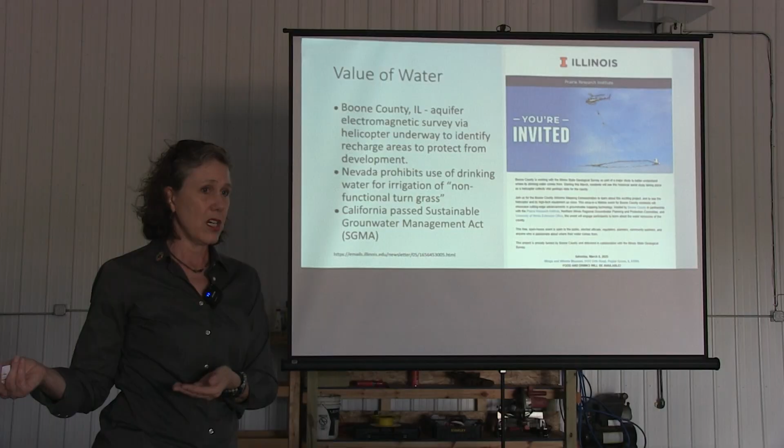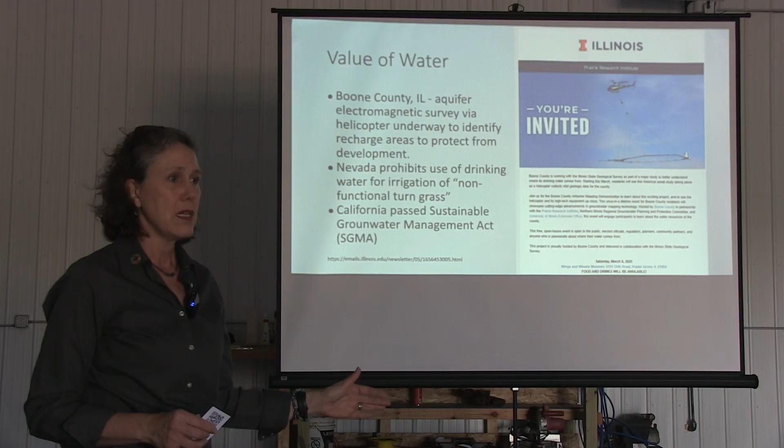But what happens if somebody just across your county line moves in with a data center or something like that and draws your water down? What recourse do you have? The answer is none. So then I asked, well, what other state's doing a better job? And another person from the audience offered California's Sustainable Groundwater Management Act. I love sharing information this way. We don't need to reinvent the wheel. We can just look for whoever else has already adopted a solution, and then we can learn from their lessons learned to adopt that in a better way.

Reuse is a really complex topic. It depends on the scale of your application, from centralized to distributed to your home, and it can be broken up by barrier, or by your applications. So we've got reuse irrigation, there's industrial reuse, there's non-potable reuse, and potable reuse. And there's different barriers for each of them. Public perception used to be a big barrier. I think once you have the need, the public perception starts to wake up to the need.

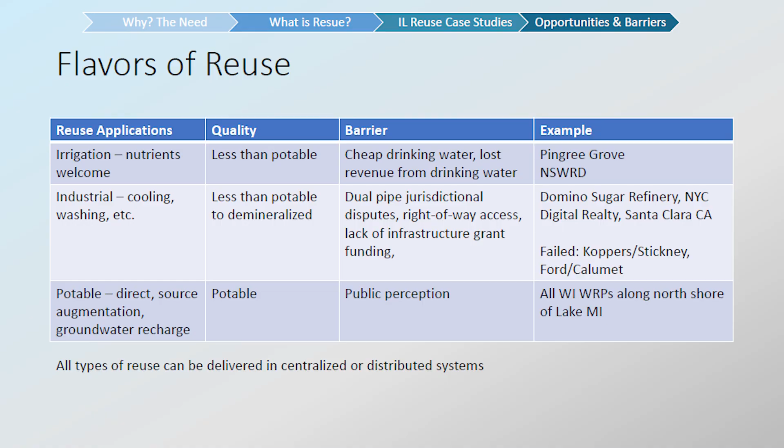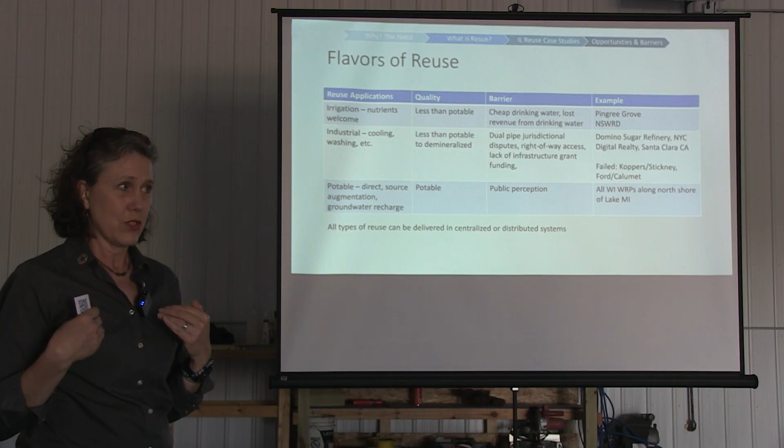And then also you can point to certain things that I don't know how publicly aware we are, but the International Space Station recycles their water every day. And so your coffee today is your coffee tomorrow. Now, they don't have industry up there, so we have that challenge. So if you were to just scrap the whole civilization thing and start over, you would not have a mixing of your industry and your residential, your municipal waste. So you would actually have industry treating their own waste.

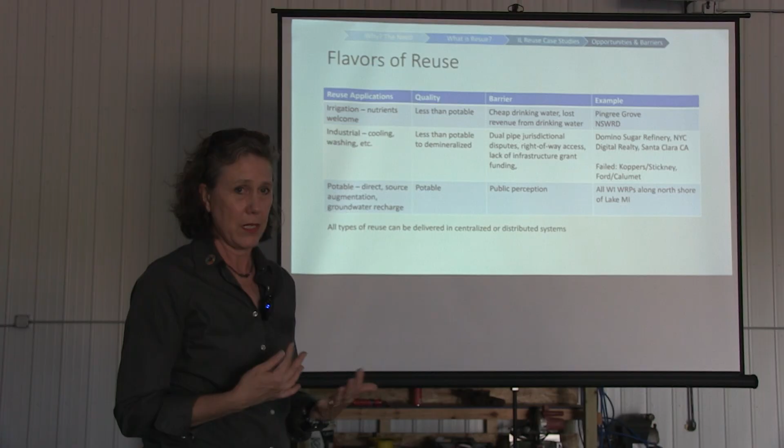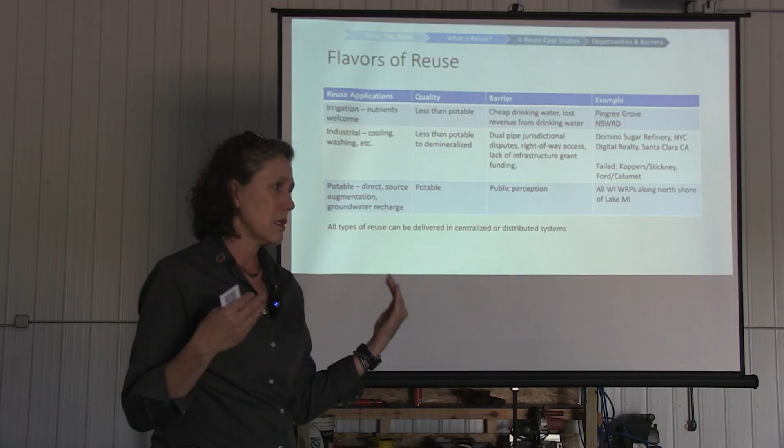I like to give the analogy of your kids cleaning their room. Do you send it all down to the kitchen to get cleaned and then bring it back up? No, you ask them to clean their room where it is, because that's the most efficient way to do it. So once we start commingling the industrial contaminants with the municipal wastewater, it makes everything harder to treat, and then you have contaminants of emerging concern, maybe things that you can't readily detect, or they're super expensive to test for, or there's no regulations to test for it, etc.

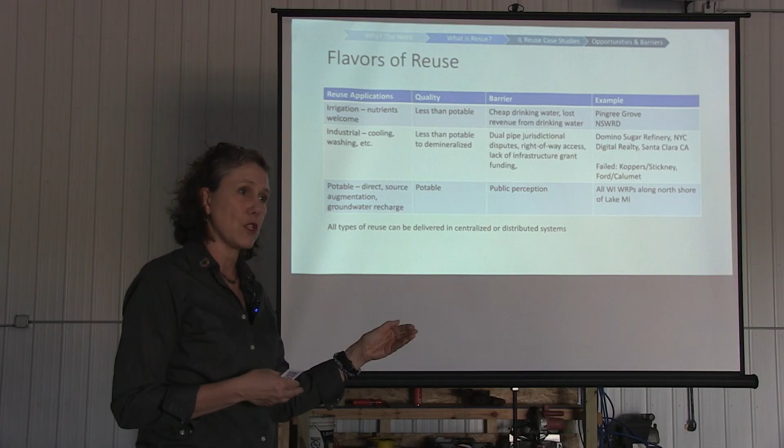Whereas if you treat it at the source, then they know what's in that water because it's what they put there, and they don't really want to tell you because it's proprietary information, but the chemicals in that water could actually be useful for them to recover and reuse. So there's the International Space Station. Coffee today is your coffee tomorrow.

I also wanted to let you know that there is a 57-year-old direct reuse project. It's not us, sorry. This is in Namibia, in the continent of Africa. It was put online in 1968, the year of my birth. So I always remember how many years people have been reusing water, and this is in an arid area. These flows are required for fire flow and also for basic sanitation. So it cannot fail. They do not have the luxury of taking this offline. And they've been doing it since 1968.

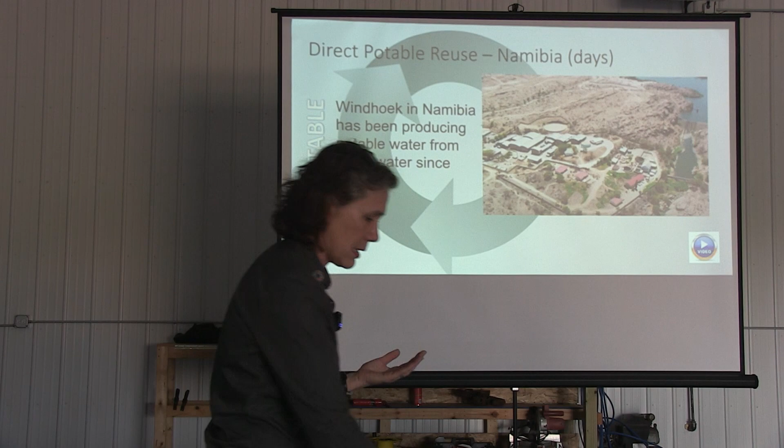One big topic that we're talking about in Illinois Section American Waterworks Association right now is what is source augmentation. Because we are the only state that actually has a reuse prohibition in our source water code, we can't really say reuse in the state of Illinois. But we're not alone in that.

Wisconsin doesn't have rules either, but yet they were able to take Waukesha off their groundwater and hook into Lake Michigan, or at Milwaukee, and then they treat it and they discharge it to the Root River, and then it goes back to Lake Michigan.

So that is an example of source augmentation, but once you start picking apart the water cycle, you start realizing that every time we discharge out into the environment, be it irrigation or to a stream or discharging to groundwater, you're augmenting the source water to somebody. It may not be you, but it may be the guy downstream. So that's just an opportunity for public education and learning right now.

If I have my way, we will have a source augmentation 101 presentation at WaterCon next March, sponsored by Illinois Section American Waterworks Association. So other examples, back in the drought of 2014 to 2016, that drought impacted from Minnesota all the way down to Texas.

So Texas was in a world of hurt, and they went from, it's indirect potable reuse right now, but they actually plugged their wastewater system. They built an advanced treatment system, plugged that into their advanced treatment, and then the advanced treatment went to their permitted drinking water plant, not because they needed to, but because that's the rules in the United States of America, that you have to have a permitted drinking water treatment plant for surface water.

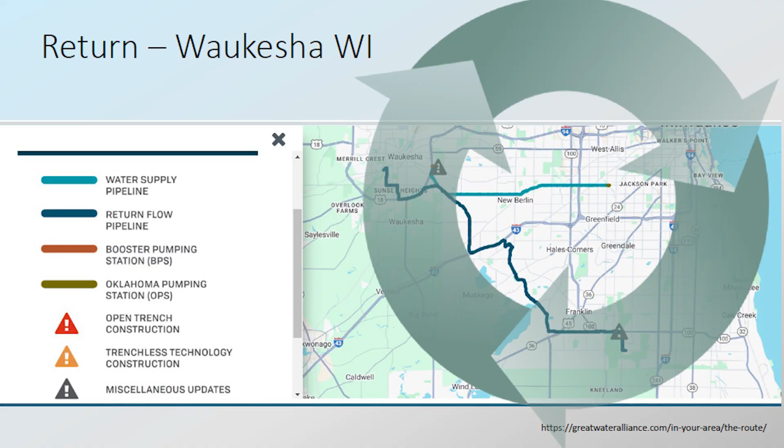But if you go to the guy who wrote the permit at Wisconsin, he will not call it reuse. And that is because they do not have the rules. So we can talk about this as return, because we do have rules from the Great Lakes Compact that you must return the water to the Great Lakes. So this is officially a return project. You can see a lot of these things are language. A lot of them are business decisions. None of this is technical.

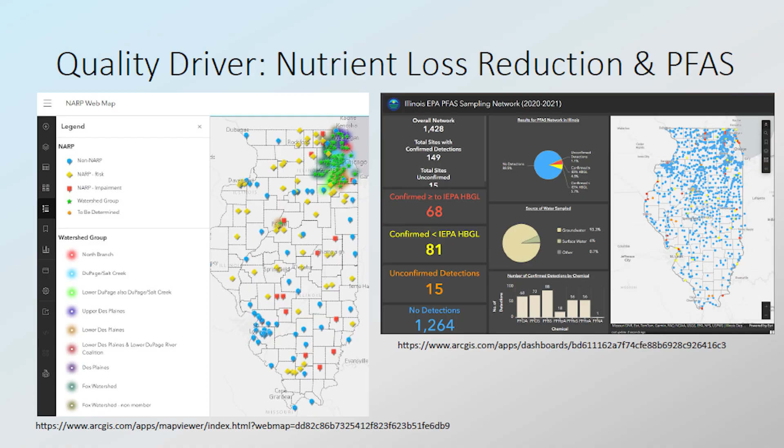Here's the nutrient dashboard from IEPA, and we also have the PFAS dashboard from IEPA. So the folks at the state will say PFAS is the reason not to do reuse. But if you talk to the person who wrote the guidance document for Texas at national conferences, she'll say something like: direct potable reuse systems, those processes will be more resilient and able to handle removal of PFAS than traditional.

I think that says the processes can do both, but I think her way is the better way to say it. My way is just shorter and probably more direct, right?

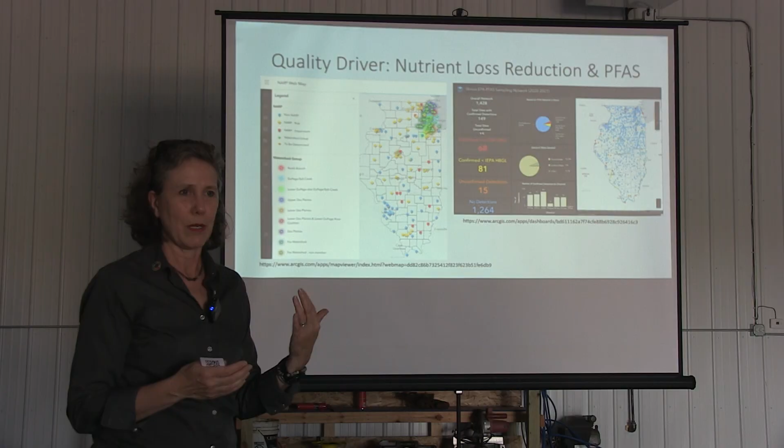We do have the nutrient reduction strategies that you're all aware of, perhaps painfully aware of, where decreasing nutrient concentrations are begetting questions of: do we upgrade our treatment plant, or is there some other option? The irrigation permits are where this has come in, because if you take your discharge and field apply it, land apply it, you could perhaps avoid some costs.

This is an avoided cost, right? So this is a balancing act, except you have to know that's an option, because right now in our code it says 200-foot setback for treated effluent irrigation. And there's pretty much no place in civilized Illinois where there's 200 feet of setback around a wastewater treatment plant. So that's kind of a deal stopper right there.

And then you can do a 25-foot setback if you have a 4-foot fence. And the third option is, if it's a golf course, you can do whatever you want, as long as it's at night.

All right, so here's the drivers. This summarizes what Scott was mentioning. This is a publication from the Illinois State Water Survey from 2017, and I like to compare this.

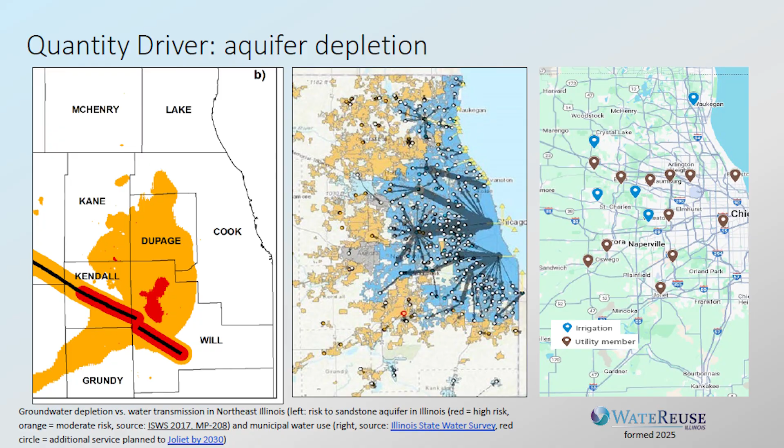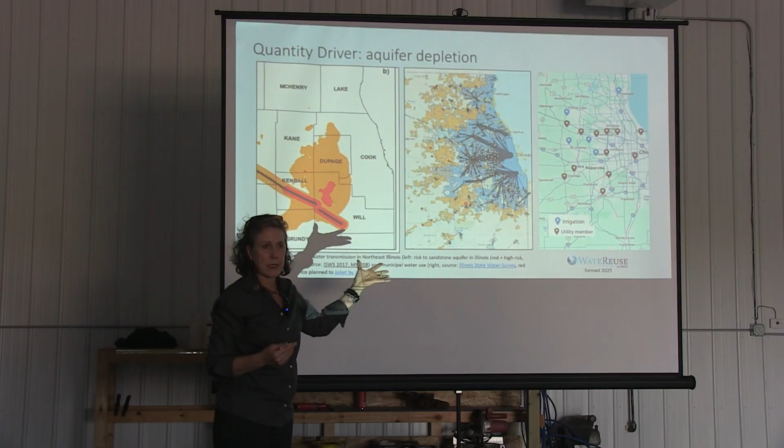Is that fuzzy? I don't know if I should. Can you guys see it? Maybe that's a little better. So here's the aquifer that's drawing down, and I just like to compare the overlapping. The middle one is all those pipelines extending from Lake Michigan water.

So right now we have two kind of soft policies at IEPA. One is interpretation of the 10 State Standards: use the best available source. So they're saying, as they decided the permit for Joliet, that only Lake Michigan is the best available source, not accommodating any kind of quality or economics of extending the pipeline.

Now if you extend a pipeline, the longer it goes, you've got this kind of linear-ish curve of cost increasing with distance. But if you do reuse, that's a localized treatment, and that's a flat cost. So at some point those cost curves are going to intersect, and it's going to be cheaper to build a reuse treatment plant on site than extend water from City of Chicago or some other West Shore producer.

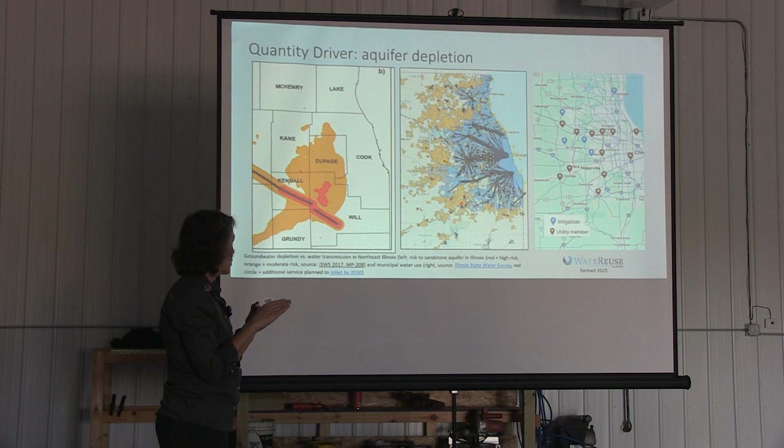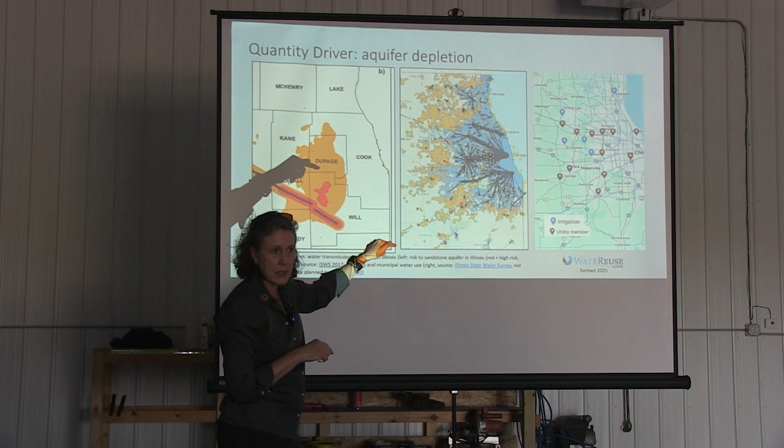Then the right one, stage right, is where we have the new chapter of Illinois Section Water Reuse Association, the brown dots—perhaps I should have picked a better color. But a bunch of those are Metropolitan Water Reclamation District, which has 7 plants. And the blue ones are irrigation, recycled water irrigation applications. I'm learning about new ones all the time.

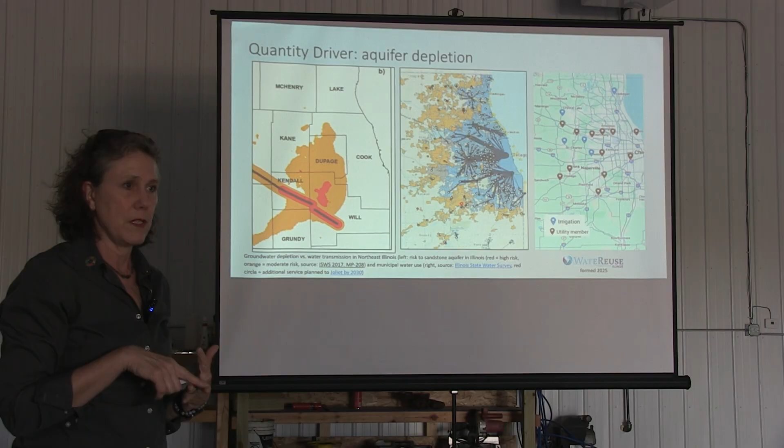And one specific one that isn't irrigation, it's industrial: you might be aware there was a bill passed and just signed last week, maybe more than a week ago. Pritzker signed a bill allowing Bloomington Normal to sell within a 50-mile radius. I have a slide on that, so we'll talk about that again in just a moment.

So the opportunities are basically irrigation, to share your nutrients—which are a valued resource—with folks who want turf grass. The other opportunities are data centers. We have in Chicago, right on the shores of Lake Michigan, the proposed largest quantum computing site in the world, I think it is.

It's this big collaboration, and I think if it's worked right, this could be an opportunity for transparency because the government is involved—that's our tax dollars. We should have a little bit of say as to how that's operated. There was an article in the Tribune a couple days ago that said Illinois was the 4th largest data center state. I don't know if that's accurate, I guess that's just numbers, because they don't really know how much water people are pulling since it's all proprietary. Why that should be is another question.

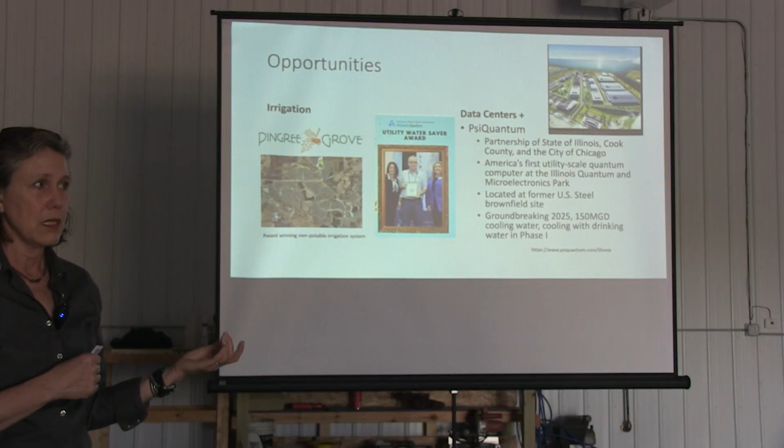That's interesting that more information is needed. So this quantum facility, best available information is that they still want to break ground this year, but as of June, they hadn't transferred the property yet. They do want to use drinking water for phase 1 and a total flow of 150 million gallons, but I assume that's fully built out.

The other thing in the Tribune, and I would love to fact check this one, they said 97% of all data centers use drinking water for cooling. That blows my mind. So we are reaching out to the author of that article in the Tribune to try to figure out if that's true.

As I mentioned, I need to introduce the engine behind me, which is Kelsey Hall, my policy director at Metropolitan Water Reclamation District. Is that 150 MGD, is that correct? 150 MGD in full build out. They're pretty much committed to using drinking water for cooling in phase 1, and I don't know what the flow proposed for phase 1 is. They just want, their timeline is their biggest crunch right now, so whatever they can do to get stuff going ASAP.

But I am trying to get vendors for air-cooled systems that could just be an offering, like, hey, do you want to consider this? And then another challenge would be trying to get in the same room to talk to them. Yeah, I don't have their phone number.

So in 2021, after thinking about all of this, I worked on a project for the state of California to determine if direct potable reuse was feasible. Yes, the answer is yes. I was one of 33 projects, not by myself. I came off of that with language because I had to review other state codes, and then I come across this prohibition on water reuse.

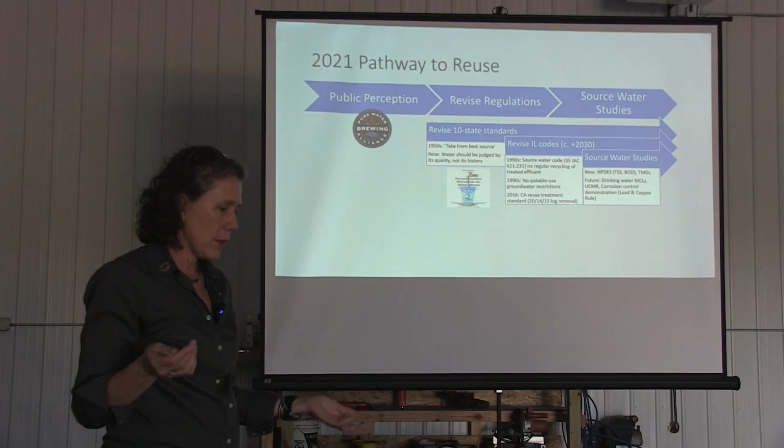Need more. So in my vision, I thought we needed to revise 10 state standards, then revise that code to repeal the prohibition, and then we had to do source water studies. That's what I thought back in 2021. At this time, I thought this was going to take us 20 years. That was 4 years ago. Look at the progress we have now. So we are far exceeding my expectations, but it has not been the linear path I thought we were on.

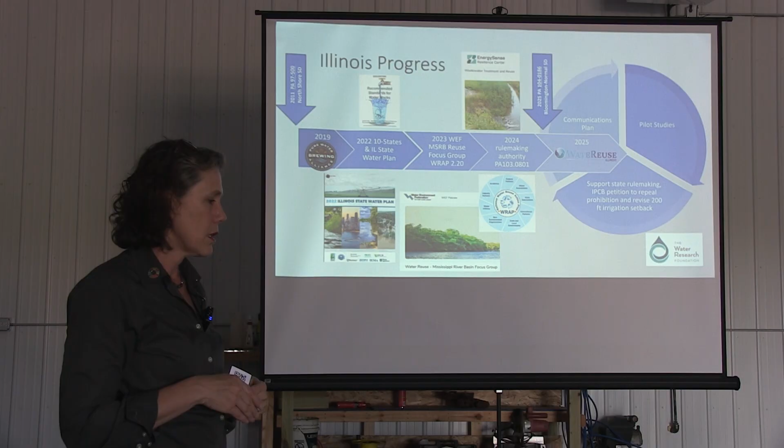So we've had a few legislative pieces. In 2011, North Shore Sanitary District proposed legislation to our General Assembly, and it passed and was signed by Governor Pat Quinn to allow them to sell their treated wastewater effluent to, I guess, one golf course in particular, but this was supposed to allow them to sell more. That opportunity, that market never materialized because of competition with water revenue for their drinking water provider, Highland Park. Then in 2019, we did the beer, and through no help from me, 10 state standards just decided to include in their forward policy statements on both reuse and PFAS removal.

And I just said thank you in 2022. But then additionally, I got some advice on how to participate in public comment for the 2022 state water plan, and they took my advice and had a recommendation in table 13.2 to make rules for water reuse, and they regretted that ever since.

Then in 2023, we formed the focus group for the Mississippi River Basin. The purpose is trying to collect more states together that might have similar issues so that we can get a critical mass of experts from across the country and our major professional water organizations. That's American Water Works Association, Water Environment Federation, and Water Reuse Association.

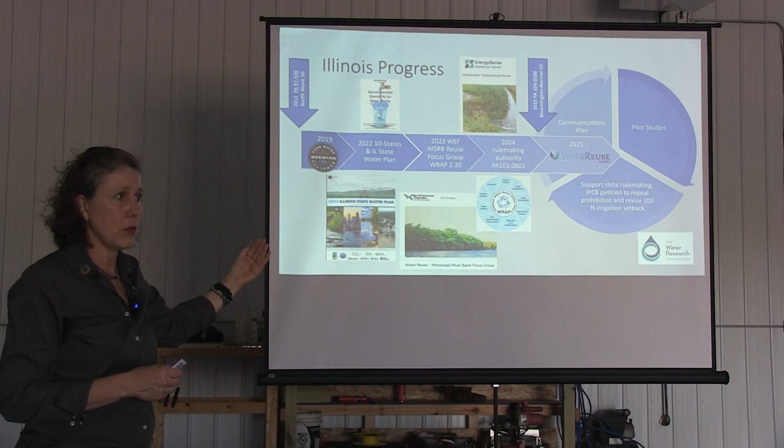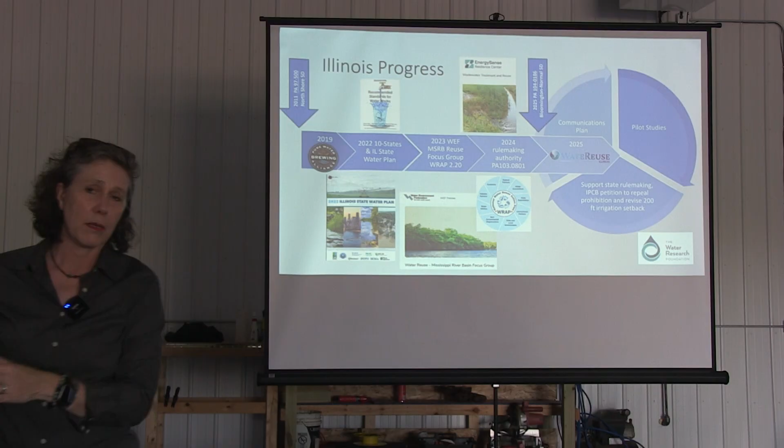And then somehow we need to find a way to support the repeal of that prohibition, be it through a petition to the Illinois Pollution Control Board—for which I will have a bake sale at all future events to hire the attorney. It's going to cost $20,000 for the attorney, so if you see me at a bake sale booth at any of the professional water organization events, come by and buy a piece of banana bread or something.

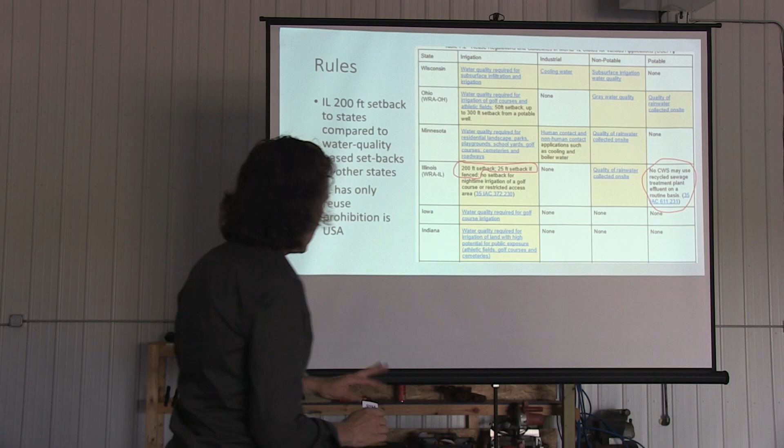All right, so here's just an example of the rules. I am blathering on—we're 40 minutes in already, so I'll just leave you with, here we are.

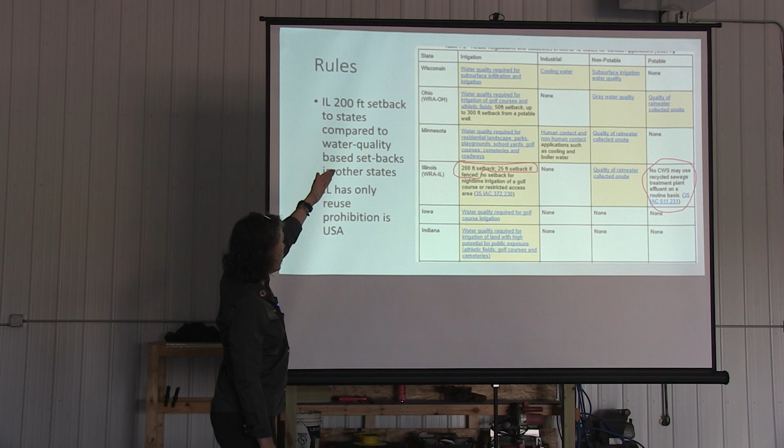Here's straight from our code: we've got a 200-foot setback, 25-foot setback if it's fenced, and no setback for nighttime irrigation on a golf course—and there's our prohibition. Let's just focus on irrigation for today, because that's the low-hanging fruit and that's how we're going to have the advantage for nutrients. If you look at the other states with rules in the 12 states of the eastern Mississippi River Basin, they're all quality-based. We're the only ones with a flat 200-foot setback, regardless of water quality.

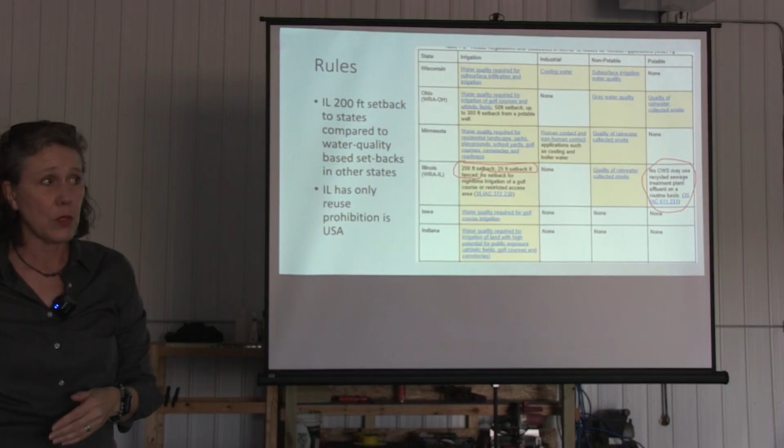Now, I'll go back to the International Space Station—you can treat water to potable standards. Even on the CDC website, at least as of last month, there was a statement that said all water can be treated to potable standards, no matter how dirty.

So you imagine a world where you could consider water based on quality.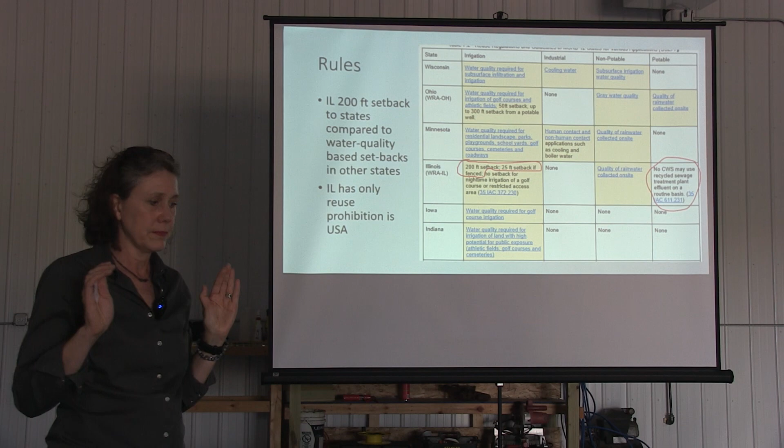So the spray irrigation permits, as you know, are all handled by Getie Yilma. She handles them on a case-by-case basis. You have to know that that's possible.

But they also have this soft internal policy in IEPA that if they consider land application, land is equal to treatment, and tertiary treatment, or nutrient removal, plus land application is waters of the state, so no permit is required.

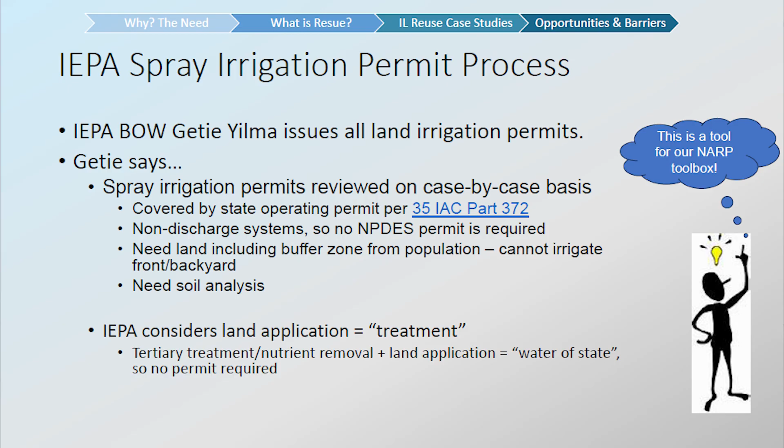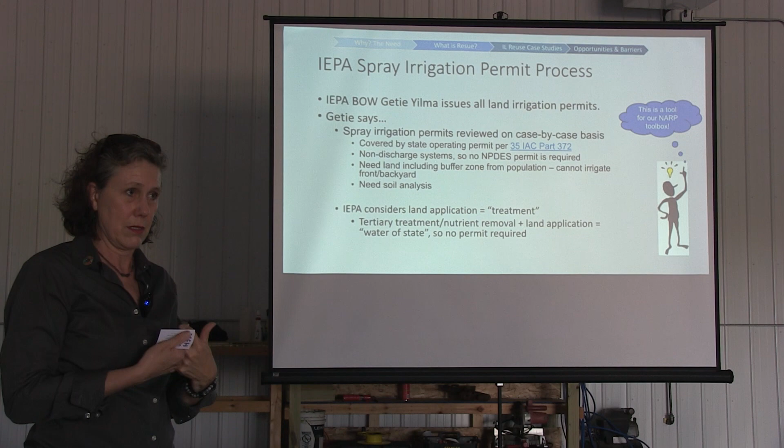That's kind of awesome information to know where they're coming from. And this, I think, is kind of the thread in the sweater of how to talk to IEPA - we need to forge a collaboration. We need to work together in a collaborative way to make these rules. And I know that that is hard. The biggest challenge is for our state government to feel threatened by the regulated people. So we have to find - it's all how you say it, right?

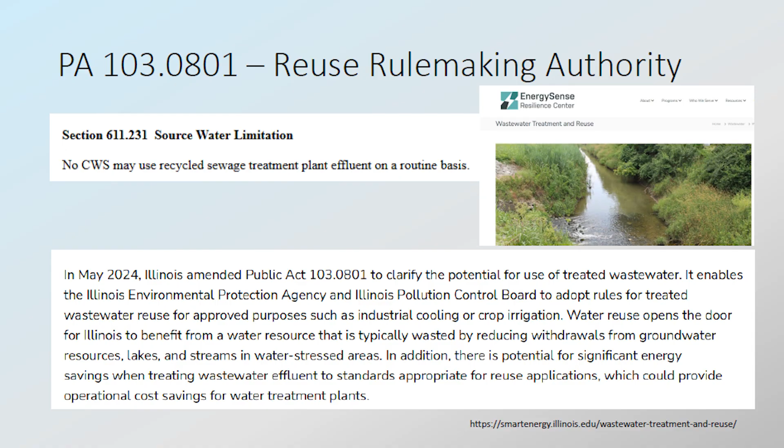Okay, so I guess that there is the actual code. So here is the public reuse rulemaking offending sentence: 'No community water supply may use recycled sewage treatment plant effluent on a routine basis.' It's such a small sentence, right? It really shouldn't be that hard to just scrub that out.

I will say that when I started this at the public comment of Joliet, there were additional 2 sentences. This used to be 231C. There was A and B, which also included coliforms and total suspended solids. They removed those quality statements, but they left the no recycling of treated effluent, which I found puzzling again, because... anyway, yeah. Quality, right? It's all about quality.

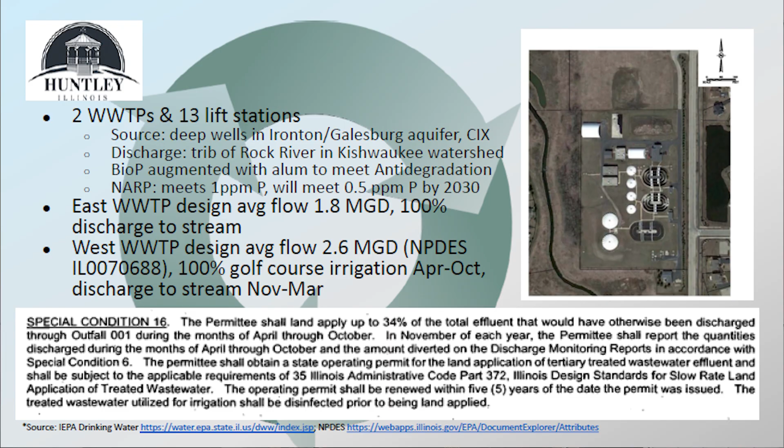So I'm gonna just run over who's doing irrigation that's willing to go public. I will go over this super quickly because you'll hear more from the Huntley folks on this. They irrigate the Del Webb Sun City golf course, which is the subject of our tour.

So what is very interesting about the Pingree Grove system is that it is an exception to the rule. It is irrigation of parkways. So there is a golf course, but it's not the bulk of the project. So IEPA had to take a chance at a variance - it's not the 200-foot setback, it's not the 25-foot setback with a fence, and it's not a golf course.

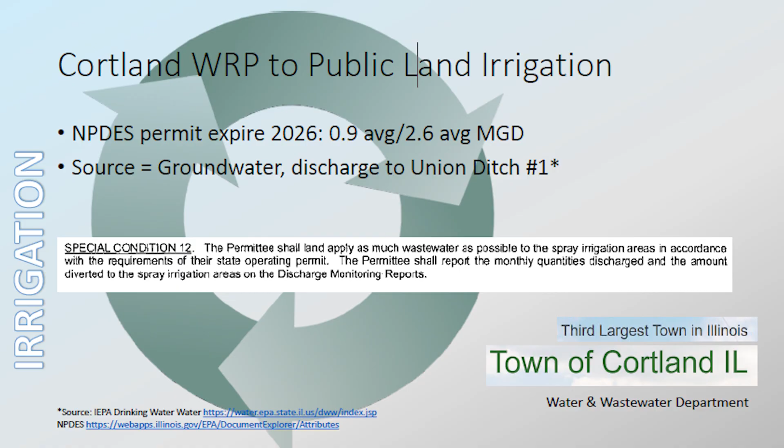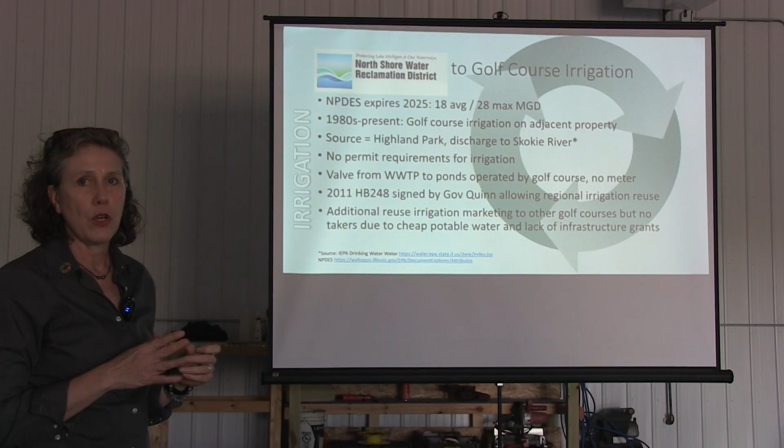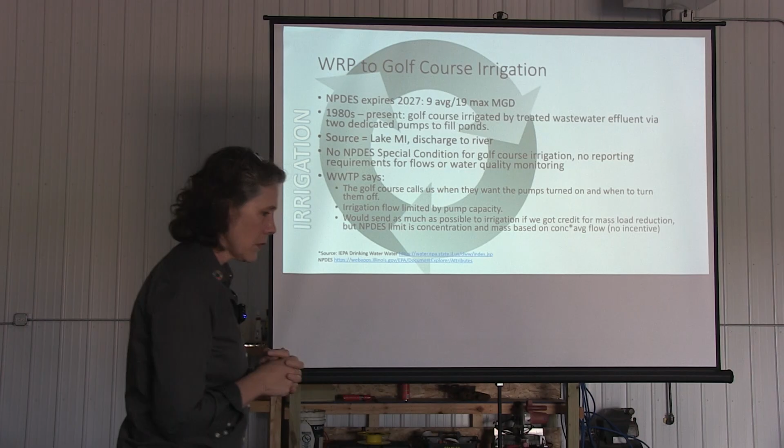They have no permit. It's a 0.3 MGD capacity plant, so they do 100% discharge. North Shore Water Reclamation District, they're the ones that passed legislation back in 2011, but then found no additional folks to sell their water to, purely because of competition for water revenue. Not technology, a business decision. There are some anonymous ones too that I can give you stats on, but maybe they don't really want to go public because they don't want to incur more regulation.

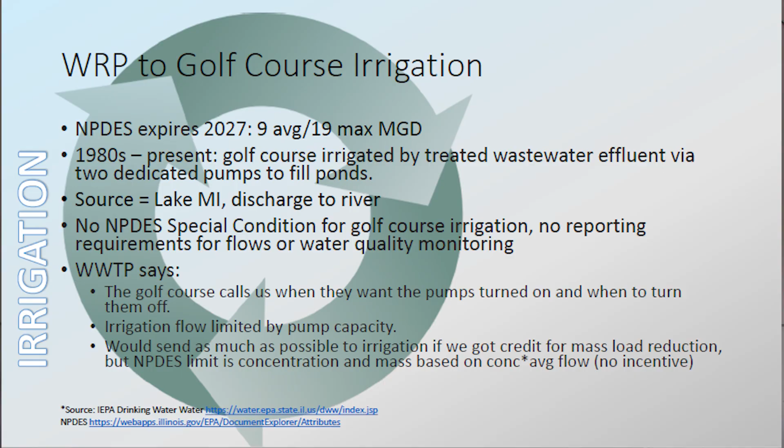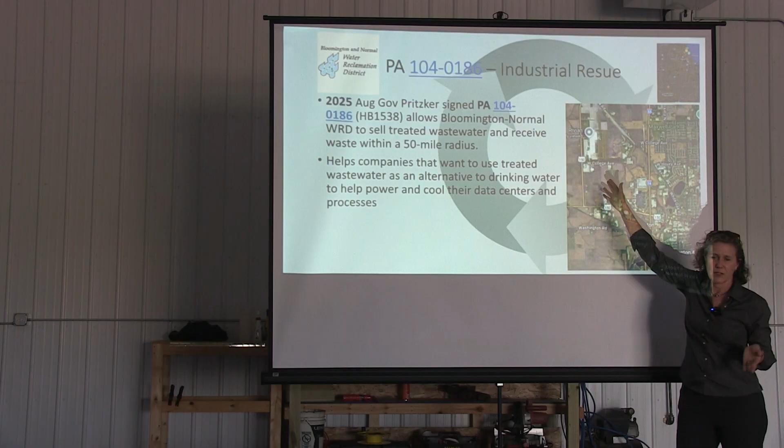So here is the Bloomington normal rule that just passed. It allows the Water Reclamation District to sell treated wastewater effluent and receive waste within 50 miles. I'm not saying anything because this is where I'd love to have facts, but I don't. I'm just showing you where the plant is, and oh my, what is that? I'll just let you guys read. I can't confirm that that's where the water's going, but I highly suspect that that is why they passed this legislation. Good for them too, because they have sustainable development goals.

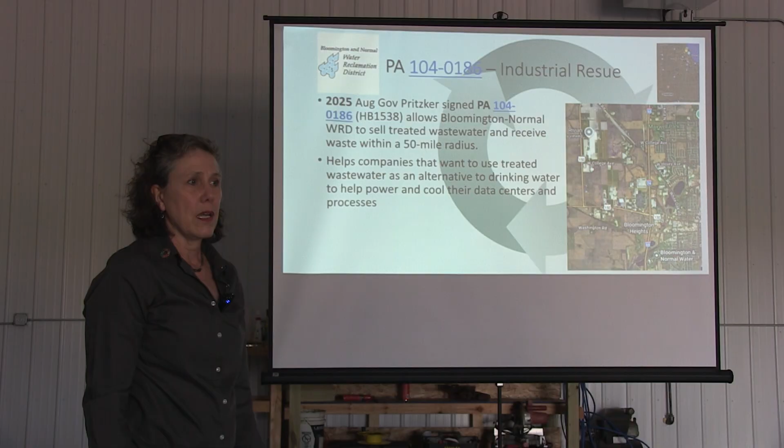So from an industrial standpoint, now this is a different application. We've been talking about irrigation up until now. This is industrial. Those big industrial companies that have sustainable development goals are more likely to reuse water than those without. For instance, the Ford company in Calumet sought to use the Metropolitan Water Reclamation District Stickney plant for reuse, and the City of Chicago said no way are we losing that big customer, and the mayor walked right down and cut their rates to kill the reuse deal. This is a company that has built a sustainability center on the south side and is very public about their sustainable development goals.

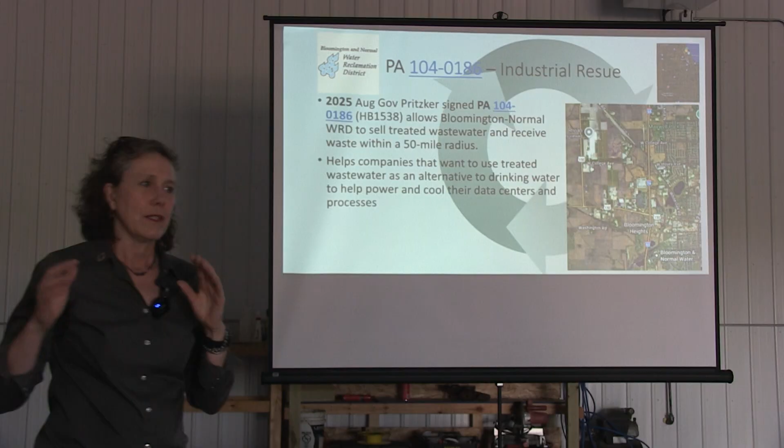Again, this is a business thing. It is how you structure your rates, how you keep the water utility whole so that they can maintain their infrastructure, because nobody wants to be broke and not be able to, especially in the days of lead service lines and all that. Nobody wants to be the next Flint. So our utilities must remain well-funded.

So here's another case study on the irrigation side. Nevada as a whole passed a law. They're much different, this is a very arid state. They passed a rule: no Colorado River water, no water derived from Colorado River water may be used on non-functional turf grass. Kelsey and I found out yesterday that includes recycled water. If that water molecule came from Colorado River water, you may not use that on non-functional turf grass, except for a single family home.

Additionally, and kind of separately, the city of Las Vegas, the Las Vegas Valley Water Authority has instituted a rate schedule, and I would guess that this is for water not from Colorado River water, so groundwater, other sources. They have increased their rates, so in 2031, their recycled water will be the same rate as their drinking water. I personally think that's genius, and that is quality-based pricing. But that's not even saying that the irrigation water is the same quality as potable. But if we could redo everything, wouldn't quality-based pricing make sense?

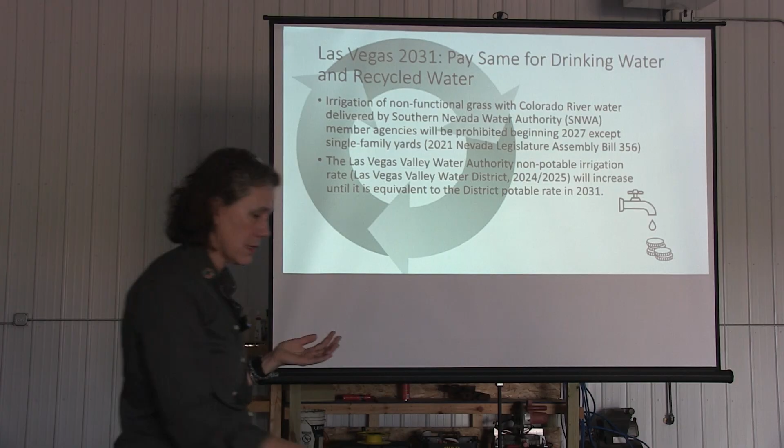So we have issues, right? How do we figure all this out? This is why we need this Illinois chapter of the Water Reuse Association as kind of, for lack of a better word, a cover organization, because individual utilities are maybe not so ready to go and talk to IEPA and take a more negotiating stance. But if we have a professional organization to represent us all, then maybe we get farther, and also come in a way that's conciliatory, as Cindy has taught me. She's my role model on working together.

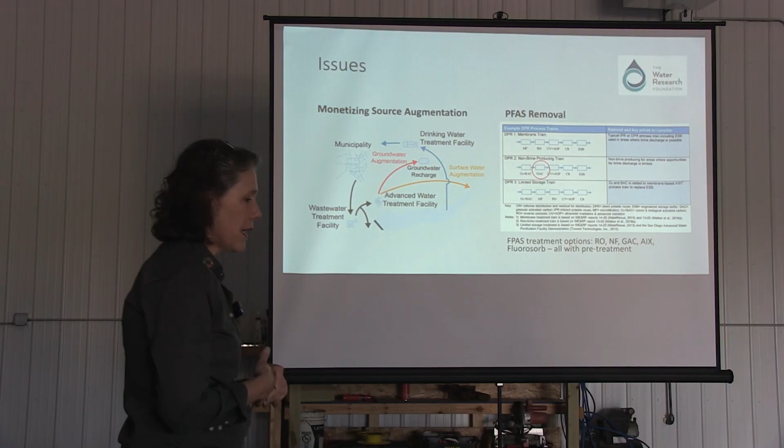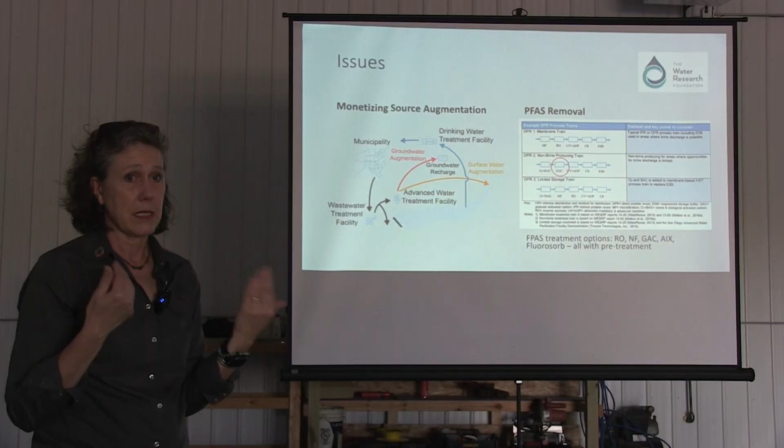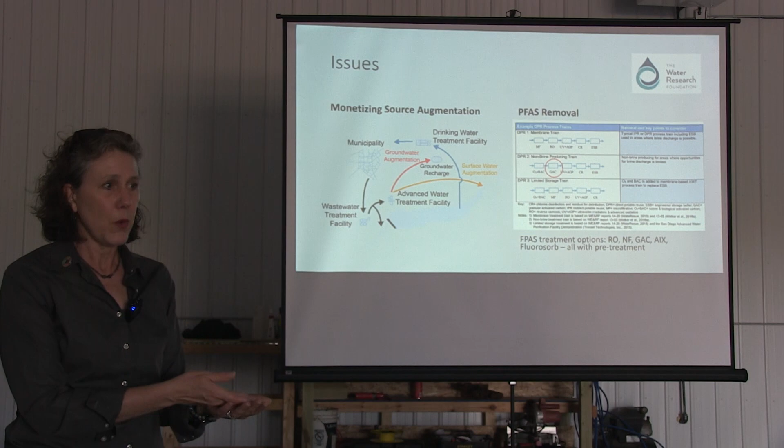So we have, how do you monetize source augmentation? I'm sure you guys probably know this better than I do. I'm starting to talk to people that work in the economic side, rates. If you have water that you're directly providing to your drinking water, that seems pretty simple to establish a rate to make the water cycle whole. But when you are discharging it out into the environment at a super high quality, or some kind of reservoir, then how do you recover the cost, how do you set the rates appropriately so that they're covering the cost of that separate recycled system? How do you pay for the recycled system?

That's one thing. And then additionally, we've got PFAS removal. Well, the PFAS removal recommendations right now, the recommended treatments are reverse osmosis, nanofiltration, granular activated carbon, anion exchange, and a specialty sorbent called Fluorosorb. If you take the granular activated carbon, that is very similar to one of the direct potable reuse trains.

So if we could just jump to the future right now, it seems to me that the answers are simpler. But of course we cannot do that. We have to start from where we are. But I think what the other states and areas have already been through is very instructive for us, so that we don't perhaps fall in the same potholes that they did. And I'm referring to a third pipe.

So a third pipe from your wastewater treatment plant makes sense if you're in an industrial park, or you're bordering properties. But I would advise caution to think of it as the only solution. I think it is a solution on a buffet of options of reuse.

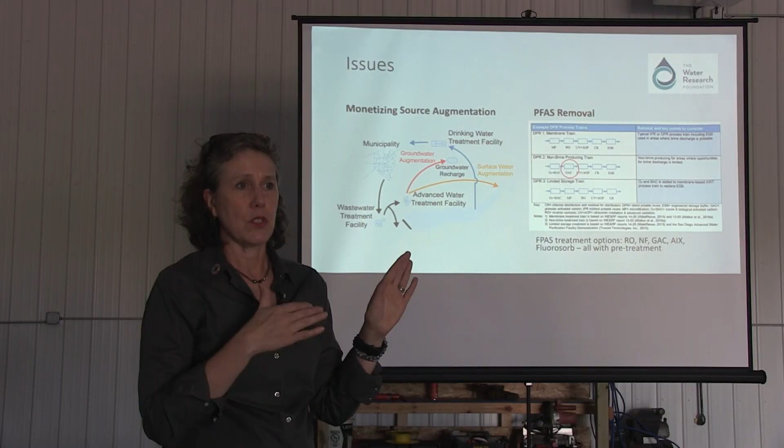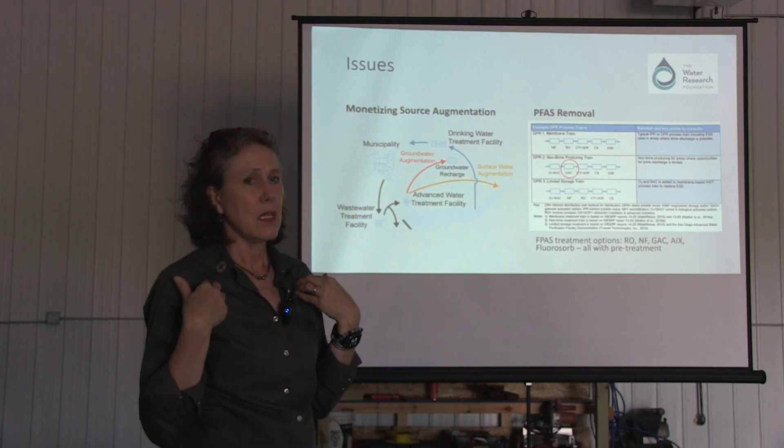Who's going to WEF next week? Yeah. The on-site conversation is really interesting, but I'm actually finding the distributed conversations to be more interesting, and also because they have answers to finance.

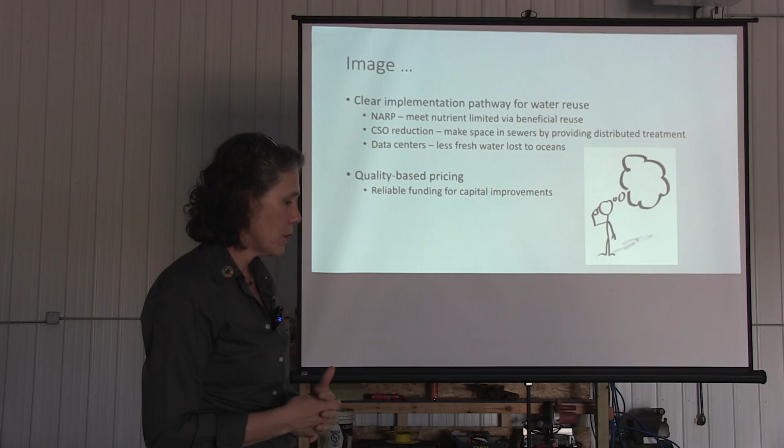So, kind of getting towards the conclusion, imagine a clear implementation pathway for reuse. What kinds of things could we solve with that? Nutrient loss reduction to meet statewide goals, combined sewer overflow reduction. We could consider a more environmentally sustainable approach for our data centers. And who wants to say no to economic development? I think that's never going to happen. So we better just figure out how to get on the bus, or we're going to get left behind. And quality-based pricing, that would provide reliable funding for your capital improvements.

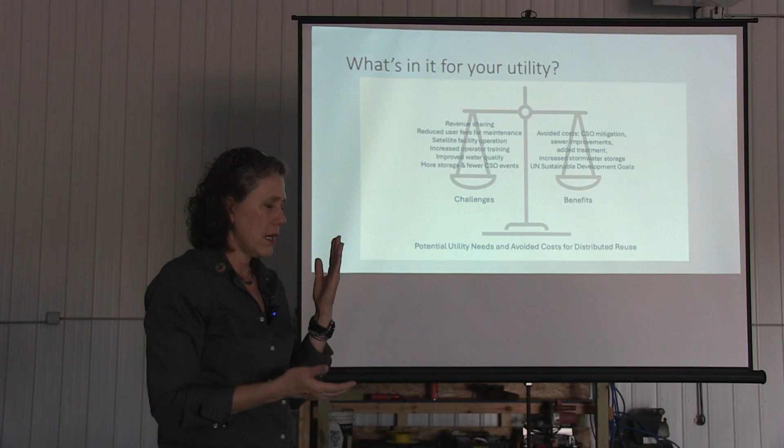So what's in it for your utility? We like to talk about this, and this is a graphic from Kelsey talking about challenges and benefits. We need to start thinking about this as the costs that we could avoid and the benefits that we could share.

The pathway to reuse: I think we need to develop an implementation pathway. That is not necessarily a permitting pathway. It's not necessarily codified rules. We could start just with a clear implementation pathway. And this is what Ohio is doing. Ohio is working with their Ohio chapter of the Water Reuse Association with 6 different committees of international consultants. I'm not just a little jealous.

And they are making a guidance document that will be posted on the governor's website. So whatever industry wants to come to Ohio, it is on the governor's webpage how to comply. That decreases their business risk and makes Ohio a more attractive place to bring your business.

We do need pilot studies to inform fact-based communication, and we do need to repeal a prohibition one way or another. One option for that is a petition to the Illinois Pollution Control Board that could be led by the Water Reuse Association Illinois chapter. But, you know, me and Sharon Waller could also put that petition in too, with my bake sale. And the Illinois state has already been provided rulemaking authority.

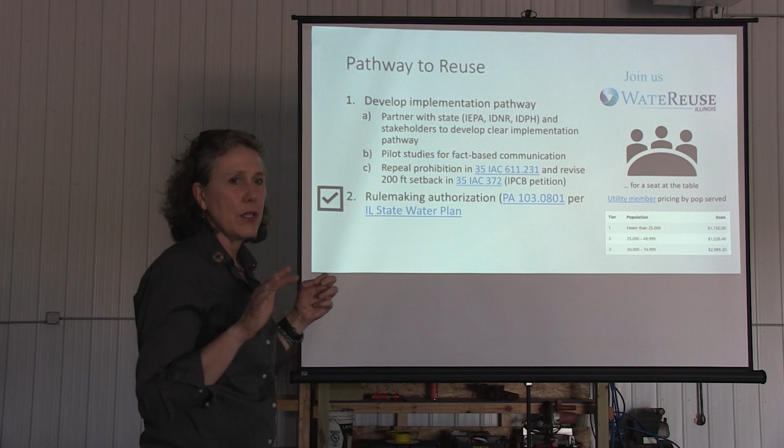It is population-based dues. This is a utility-centric organization. We don't really have bylaws yet, so I don't really know how the voting goes, whether it's by member or by utility, or, those of us who are consultants, do we even get a vote? I don't know. We'll figure that one out. But as utility members, we definitely want to hear your voice and represent you.

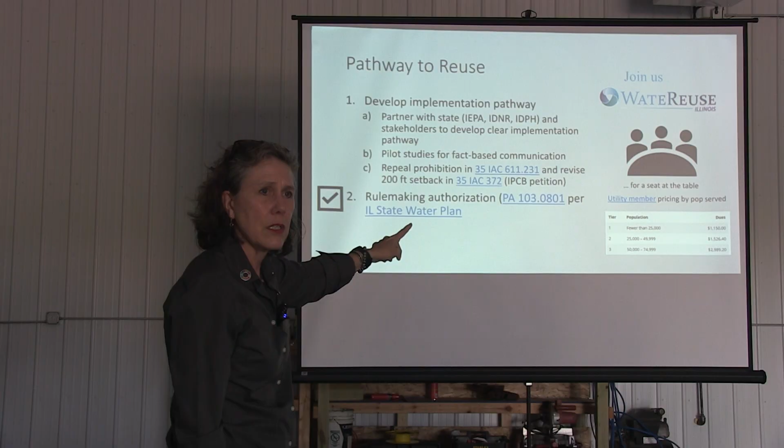And remind me, are you over 50,000 customers? We're under. Under, okay, so that'd be $1,500. I can do that on a bake sale for you.

I could do $2,000 on a bake sale. So here's the invitation to join. It was shared on social media. Come on. Oh, there we are. Because we are very grassroots.

So does your utility face source water scarcity? Are forever chemicals getting you down? PFAS, nutrient management, and groundwater depletion are all hot button reasons to establish a new water reuse association section in Illinois. We have 5 deep wells currently pumping around 3 mil daily.

We're building a 6th that should be done this spring, so we're really excited about that. That's been in the works for a few years. That well is going to be a deep sandstone aquifer that will be pumping around 1,000 GPM. It's about 1,200 feet deep and 1,000 feet for the bowl and motor.

The 5 water treatment plants that we have, they're the cation exchange, made up of resin, and we do have a forced draft aeration on the one that you guys will be seeing today that's right down here. This is a model that's going to be for well 12 also, so 12 will be a lot like what you'll see today.

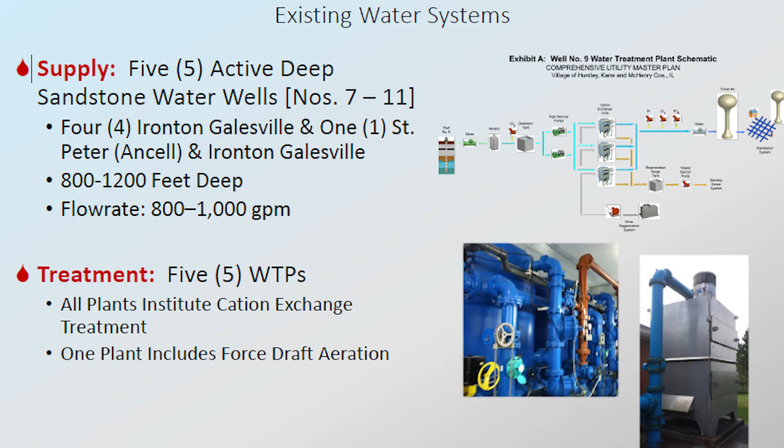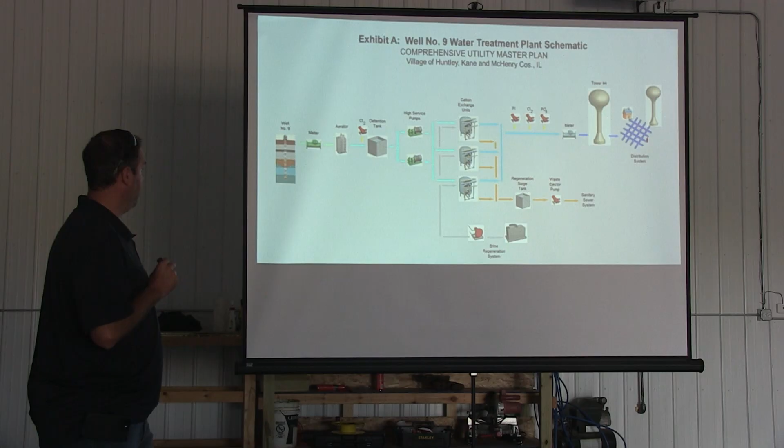Ironton Galesville Aquifer, I think we had mentioned that earlier, that is a popular aquifer for this area, so we want to make sure that the reuse is taken very seriously in the next couple of decades. Let's see, what else do we got here? So the water treatment plant schematic, we have the deep well. I know it's a little bit blurry to see. It's pretty straightforward, and this also resembles the new well.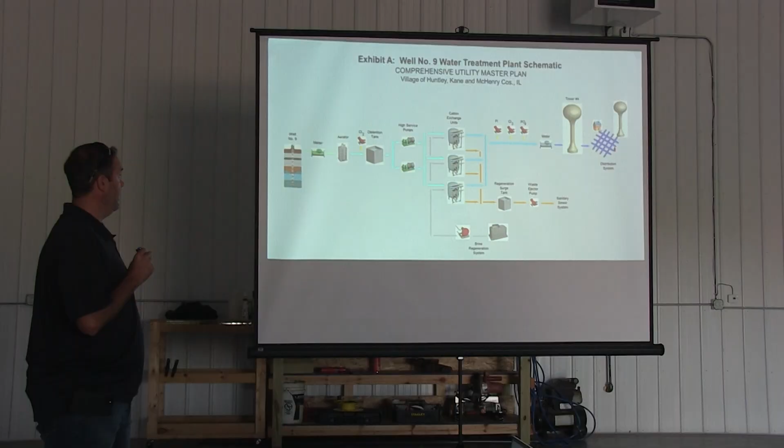It goes through an aerator first, and then a detention tank, high service pumps through the cation exchange units, into a brine regeneration system. For us, we really look and take into consideration metering, very important. We had a water loss of 7% last year. We thought that was a pretty good achievement considering the last few years. So we've done a lot with meters.

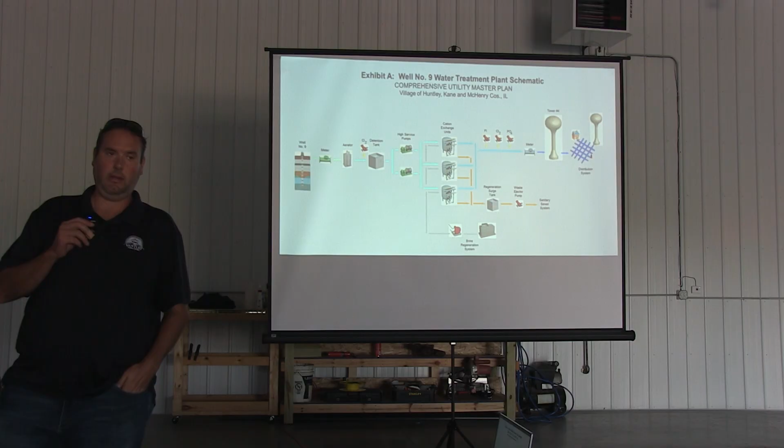We really want to get that water loss down, and that goes into what we're talking about today too for the reuse. And then we also do have 5 towers. I forgot to mention that. And if you guys would like to see a tower, we can definitely visit there too today. Any questions on kind of how this rolls out here?

3.317 million gallons is what we can store in the 5 elevated water storage tanks. We do have 2 detention tanks at 2 of the wells. Those are pre-chlorinated detention tanks before it goes through the high service pumps. More than 190 miles. So Huntley is growing rapidly. We have about 5 subdivisions right now being developed. So that's another reason for well 13, just to keep up with the demand. A SCADA system that most places have.

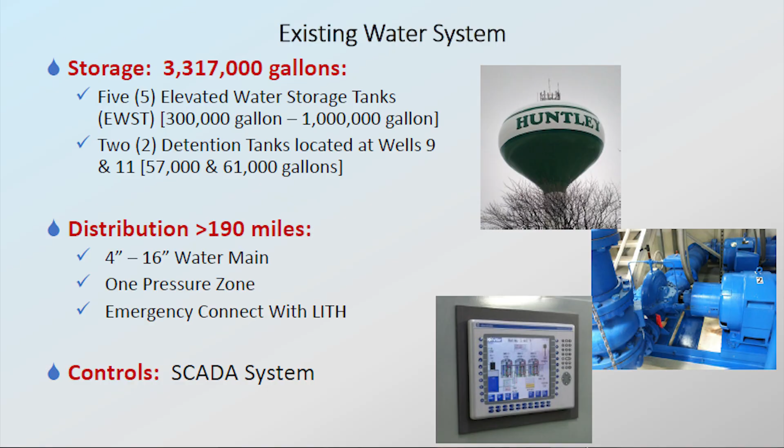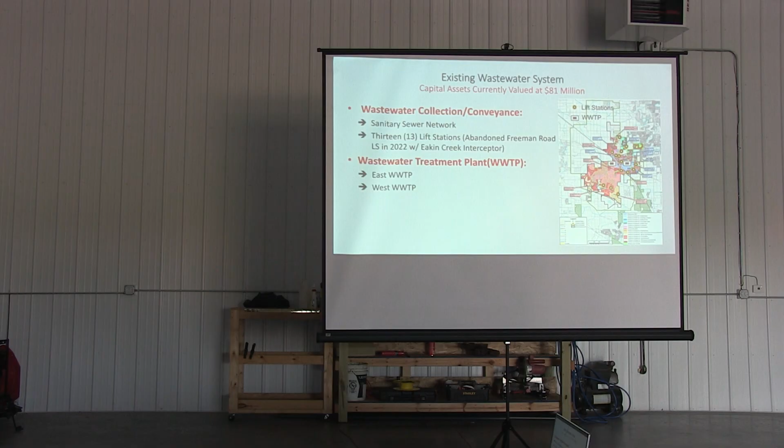I'll hand it over to Adrian for the wastewater. Do you want me to keep going? Yeah, we have 2 wastewater plants, both do a little over 1 million gallons a day. We have 13 lift stations that are spread out all over town. And I'll talk more on the tour if that's okay.

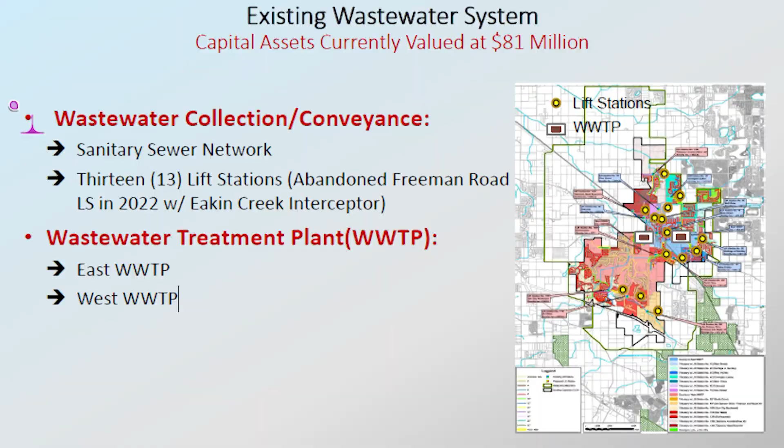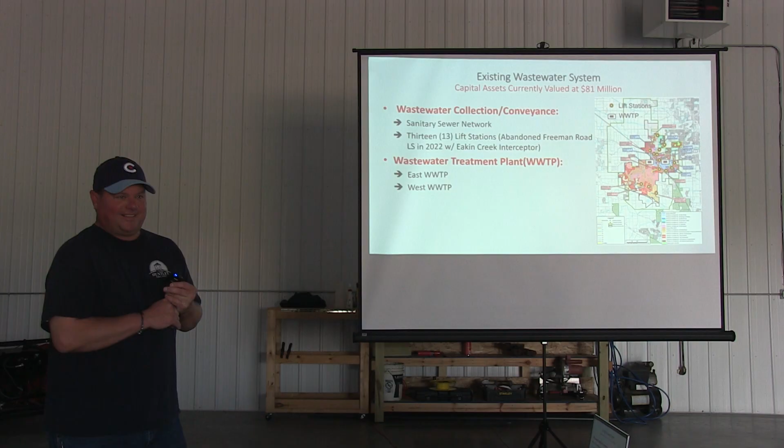Absolutely. Yeah. One cool thing, we got rid of a lift station a couple years ago. We diverted it to another one. So that's unheard of to get rid of a lift station after it's online. I was really happy about that. A little bit less maintenance and stuff, but yeah, I'll talk more on the tour though. That's all right.

Oh, okay. I didn't know I was doing this. Okay. So this is our east plant. It's the older plant, but fairly new because it's been upgraded. So a lot of the old RBCs and trickling filters have been removed and added new technology, oxidation ditches. We have 3 ditches there, 4 clarifiers, a couple aerobic digesters. We have a belt filter press. Both of our plants are pretty much the same, just like the water plants are. They're pretty much designed the same.

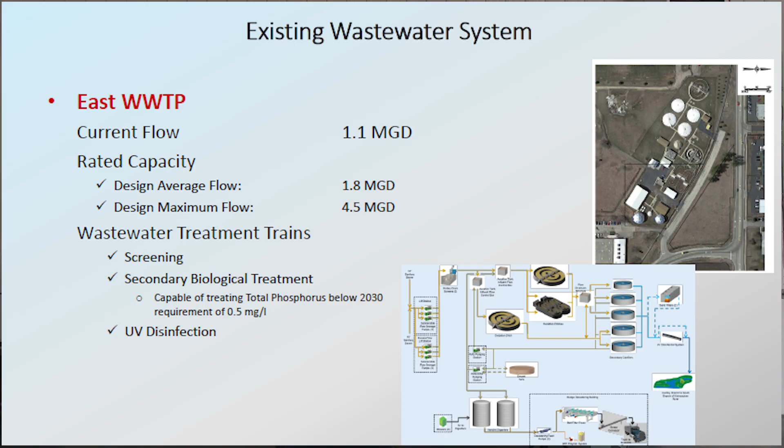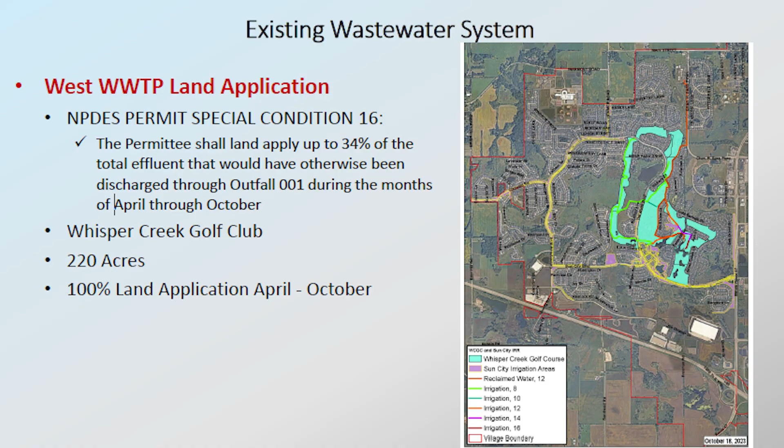What do you got to hit? Oh, I'm sorry. So we're required to provide 34% of our effluent from April through October. Sorry about that. And we send 100%, and they use it all. So we don't discharge for those 6 months or 7 months or whatever.

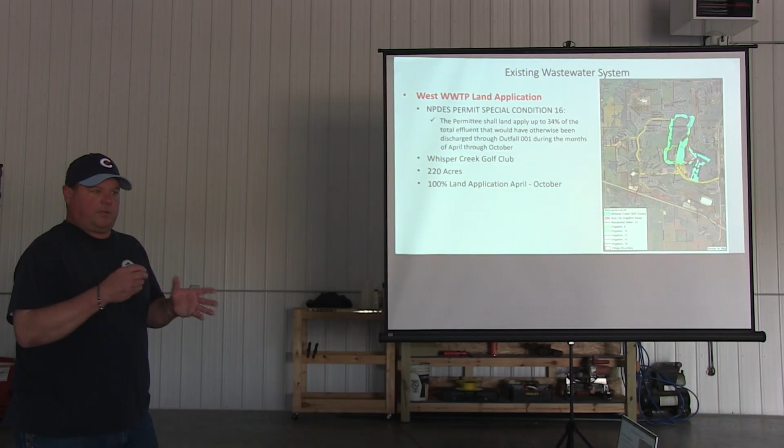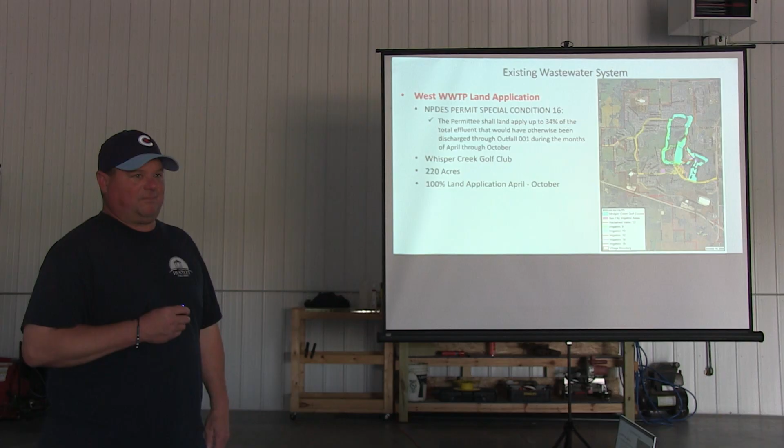And Sharon, she was talking about the drought in '14. I was telling her earlier that we had the greenest golf course in the area, 'cause I play a lot of golf, and most golf courses are just tore up. So, yeah.

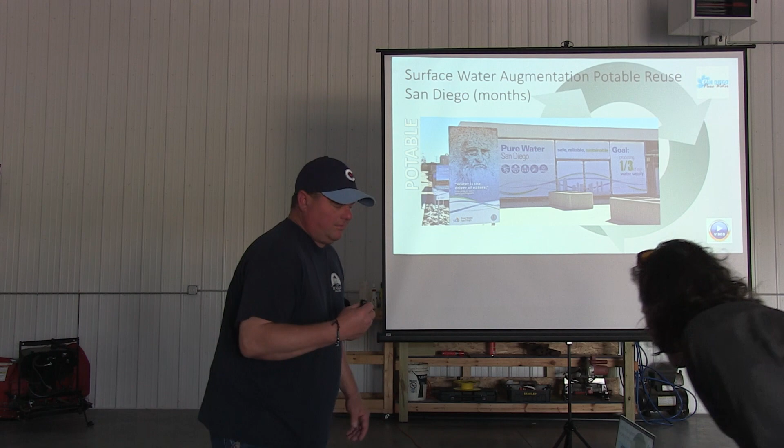Those are supplements. Oh, okay. Yeah. I think that's the questions. Cool. Thank you.